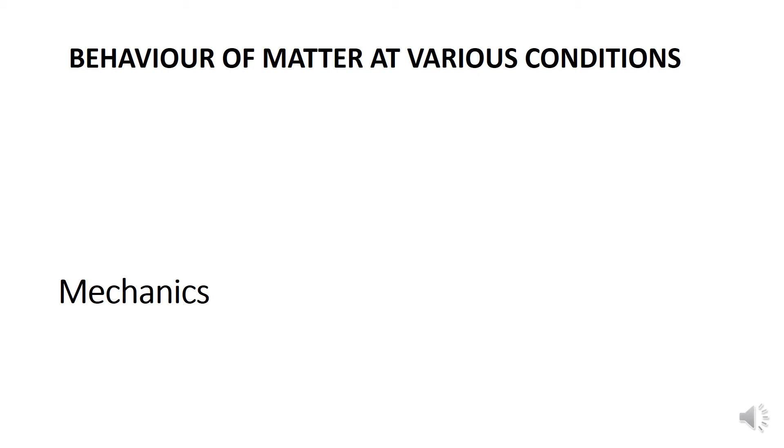Mechanics is an area of physics which concerns the behavior of matter, how it moves or behaves at different conditions. In general, if you search websites, you can see a definition like this: area of physics concerned with motion of macroscopic objects. With these macroscopic objects, we can define it for different matters.

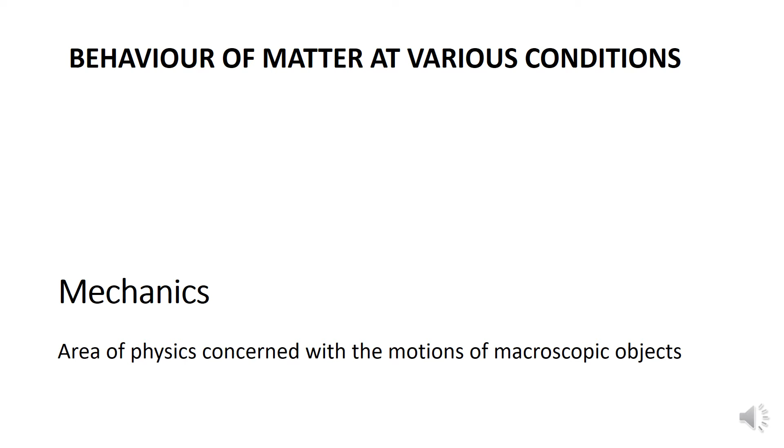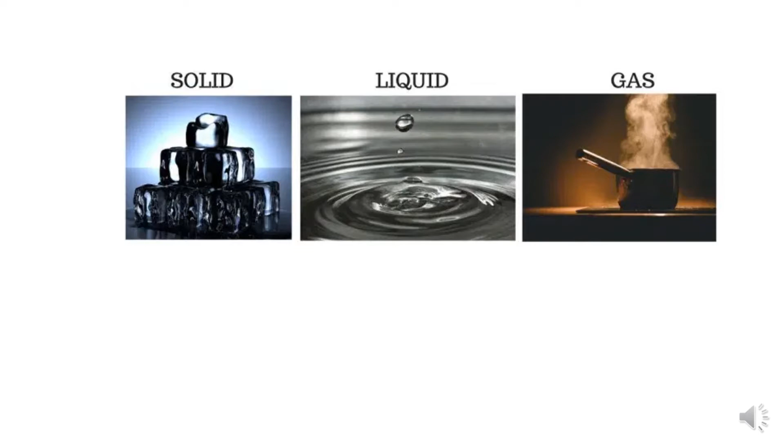As we know, we can take matter in three different forms: solid, liquid and gas. Can anyone tell me what is the difference between solid, liquid and gas? Yes, they differ based on the intermolecular attraction between the atoms. For solids, the intermolecular attraction is very high, so that's why it is closely packed.

Whereas in the case of liquids, the intermolecular attraction is comparatively less compared to solids. So that's why it's free compared to solids. Since the intermolecular attraction is comparatively higher for solids, it is closely packed and it will be

having a well-defined shape. But liquid and gas have comparatively less intermolecular attraction, and in both cases they will not have a definite shape. They take up the shape of the container. So the way a solid behaves is entirely different from how liquid and gas behave, and the basic phenomena for solids and for liquids and gases can be entirely different.

So we can classify liquid and gas into a single field. We can differentiate solid as one group and liquid and gas as a separate group, which is called fluids. In this course we will be understanding how liquid or gas behaves at different conditions, whether static or moving. Both cases we will be taking into consideration.

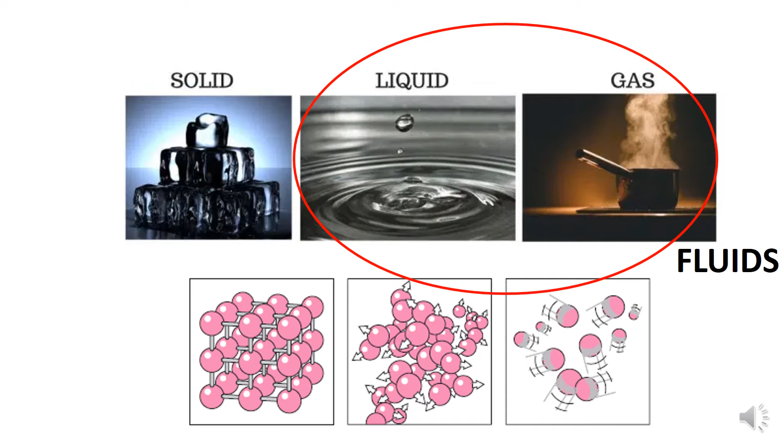In this course, mechanics, as I already explained, is an area of physics which concerns the behavior of matter. If you take the case of behavior of matter, it can be classified mainly into two types. The first one is statics and the second one is dynamics. Statics deals with bodies which are at rest and dynamics deals with bodies which are under motion.

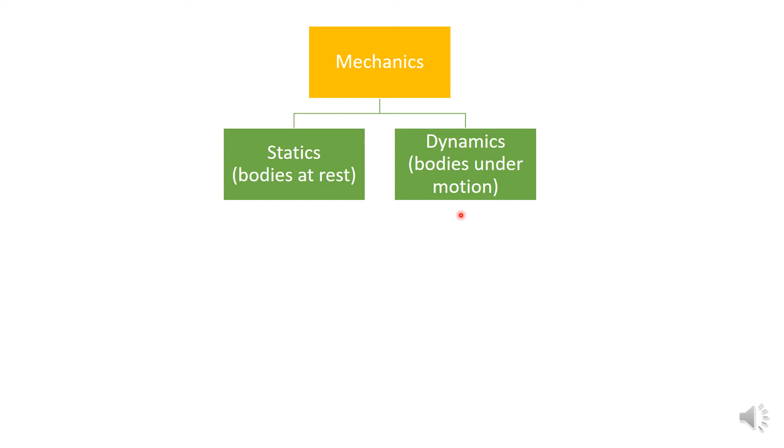In the previous phase, we classified matter into two different forms: solid and fluid. So mechanics is the science that deals with the behavior of the corresponding matter. If it deals with solids, it is called solid mechanics, and if it deals with the behavior of fluids, it is called fluid mechanics. In fluid mechanics we have fluid statics as well as fluid dynamics, where in fluid statics we study the fluid which is at rest.

One example is a glass filled with water in a stationary condition; it's a case of fluid statics. The behavior will be entirely different when the fluid is in motion. For example, water flowing through a river is an example of fluid dynamics, where we learn how it behaves in the flowing condition, how different properties or parameters vary when it is flowing, and how individual forces influence it. Such things are learned in fluid mechanics.

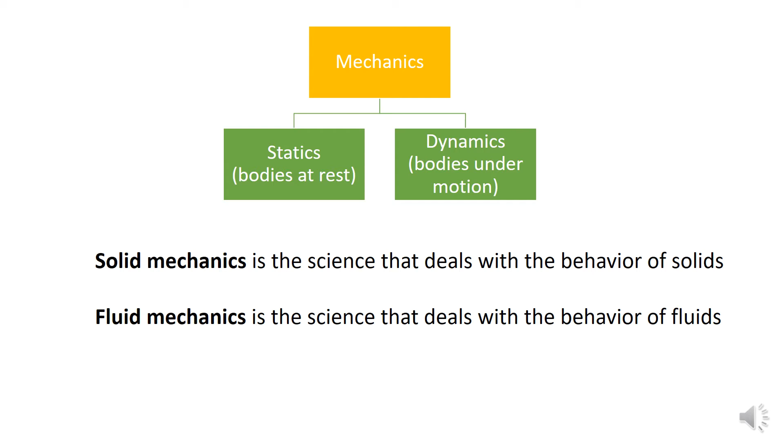Now, in order to differentiate between solid and liquid, we first need to understand a simple term called stress, which we have already learned in previous classes. What do you mean by stress? If you take a body and apply an external force on it, say a tension force on a rubber band, the body will induce a resisting force within itself, trying to pull it inwards. This resisting force per unit area is defined as stress.

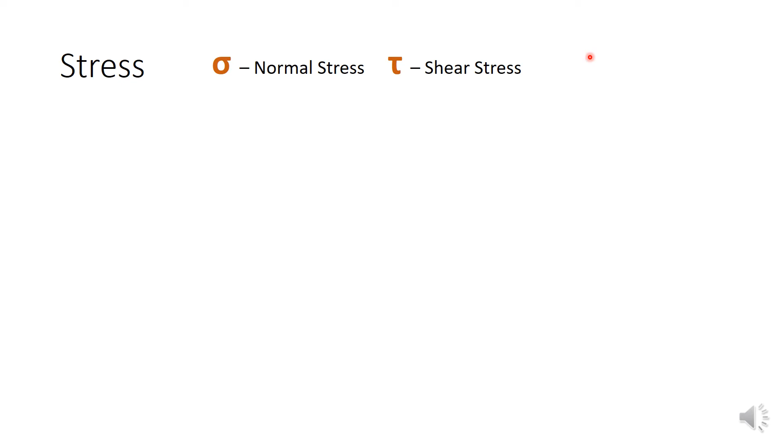It can be of two different forms: normal stress and shear stress. I'll just refresh what you learned. Stresses can generally be classified into three forms: tensile stress, compressive stress and shear stress. Tensile and compressive stress are examples of normal stress, and shear stress is a tangential stress. Normal stress acts normal to the area, and shear stress acts tangential to the area. Now how do we understand that?

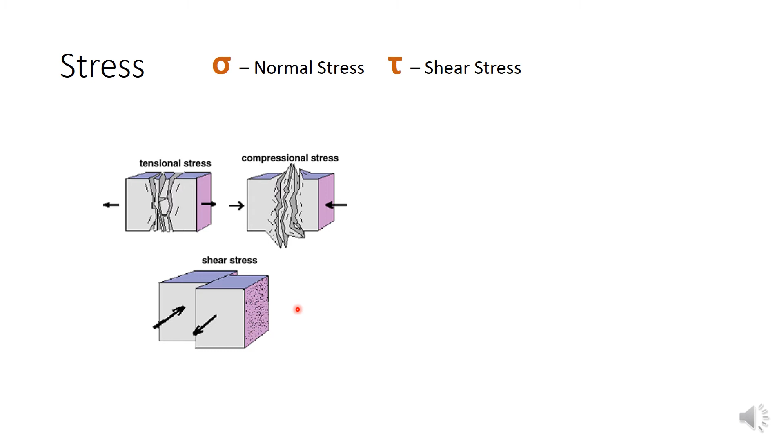Say I take a small surface with area dA, and a resisting force F is induced on the body, acting like this. If I resolve it into two components, perpendicular and tangential to the surface, the tangential component is Ft, the tangential force, and Fn is the normal force. The normal stress is the normal force divided by the area dA, so sigma equals Fn divided by dA.

In the case of fluid statics, we usually have only normal stress. We will not have shear stress because the fluid is not moving. The next one, shear stress, is the tangential force divided by area. Now we will classify solids and liquids, or fluids, entirely based on how they behave when subjected to a tangential force.

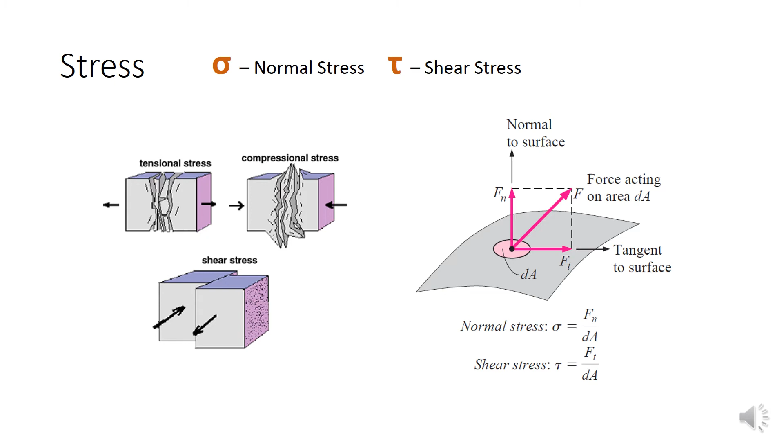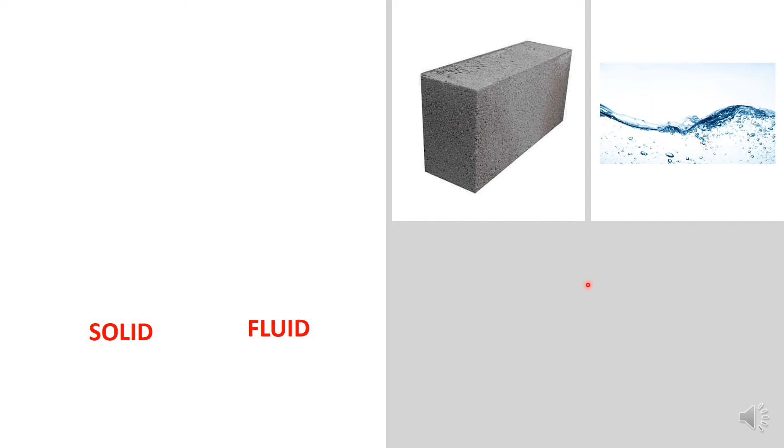Here you can see solids as well as liquids. To differentiate them, say I take a solid body placed between two plates, and similarly a fluid, which can be gaseous or liquid, placed between two plates. Assume the bottom plate is fixed and I apply a tangential force. This is the surface, and with respect to the surface the force is tangential to it.

So that's why you can define this one as a tangential force, or we will be assuming that it induces a shear stress on this corresponding plate. When that happens, if you take the case of a solid and you deform it, it will be trying to change its shape. If it is within the elastic limit, once you remove the force F, it will be trying to regain its shape.

Now if you are giving force more than the elastic limit, what happens? You will be having a permanent deformation. Once you release the force, it will have a permanent deformation, and you can't see any further deformation on the solid. But in the case of fluids, it will not be the same.

If I am giving a tangential force on this top plate, you can see the fluid will be deforming, and even if you remove this force F, the fluid will continue to move. So there is a basic differentiation between fluid and solid. In solids you will have a finite deformation, and in the case of fluids you can have continuous deformation.

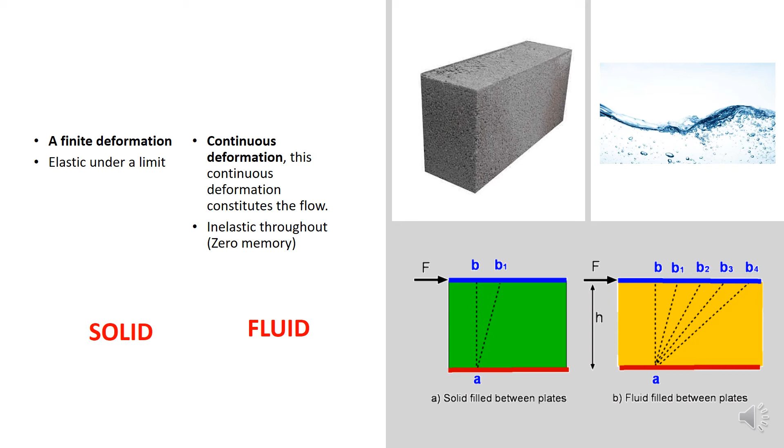Then here the stress is directly proportional to strain. Based on Hooke's law, stress is directly proportional to strain, but in the case of fluid it's different. Stress is directly proportional to the strain rate, the rate at which the straining happens. We will learn how we understood that later, in the next phases, in detail.

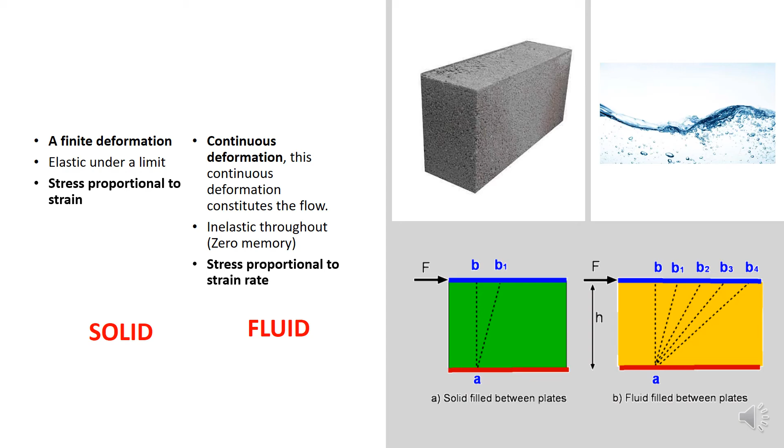Okay, the next one. So as a whole, fluid is defined as a substance that deforms continuously when subjected to shear stress, however small it is. It can be a small tangential force that you give, but still the substance continues to deform. Such substances are called fluids. That's why liquid and gas will have the same behavior, and that's why we define liquid and gas as fluids.

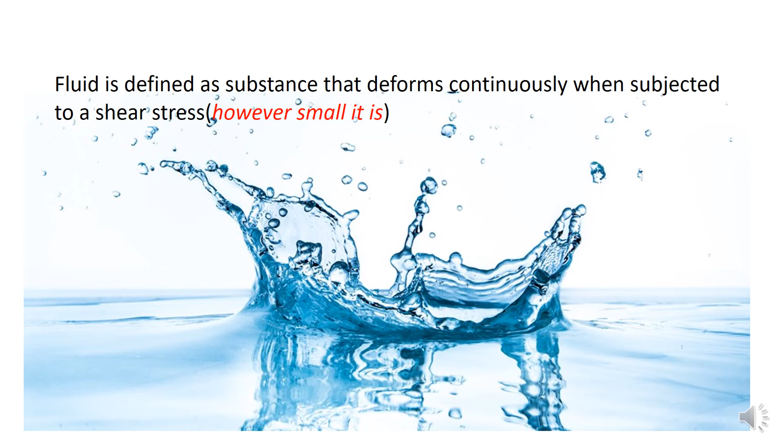Next we will understand why we need to learn fluid mechanics. In this course we will be understanding the basic working principle behind fluid mechanics, since fluid mechanics is widely used in many areas of our day-to-day life, ranging from vacuum cleaners to supersonic planes. A simple example: fluid plays an important role in our human body itself. Our heart pumps blood continuously through our blood vessels.

In the flow of blood, impure blood will be coming inside, and the pure blood has to be pumped outside. So the properties of the blood which comes in and goes out will be entirely different, and the pumping rate must be constantly controlled, and this is automatically controlled by the body itself.

And if any problem comes up in the flow, there can be problems for the corresponding person. He may become sick due to that. In some cases, we even have to replace his heart, and in such cases we use an artificial heart. For designing an artificial heart, we need to understand the basics of how it works, how the fluid travels, or how the fluid behaves at different conditions. Such details we will understand in fluid mechanics.

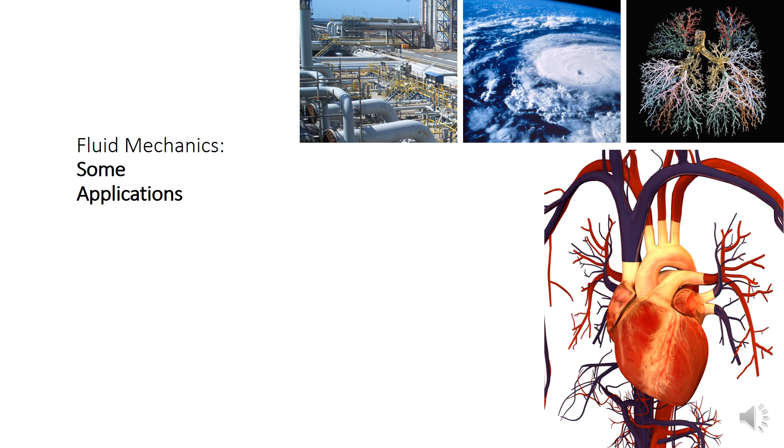When you take industrial applications, in some cases the heat generated will be very high and we need to remove the heat. In order to do heat transfer we need to have a proper understanding of fluid mechanics, how the fluid flows through the duct. Then as I already explained, F1 cars and all automobiles. Then aircraft, in all such cases we need to understand fluid mechanics.

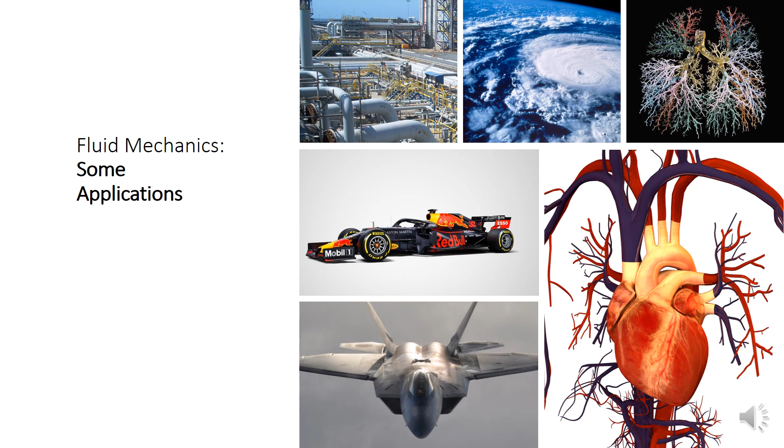Now the core objectives of this course are, first of all, we need to study mechanics of fluid motion. Next, we need to establish a fundamental knowledge of fluid mechanics so that we can address different problems encountered in different applications. Then we must be able to familiarize the relevance of fluid dynamics to many engineering systems.

As I already explained, we need to understand the fluid dynamics happening in the blood vessels in order to understand if there is any block happening in the blood vessels. For proper understanding of that we need to have a relevant understanding of the fluid dynamics of the corresponding systems.

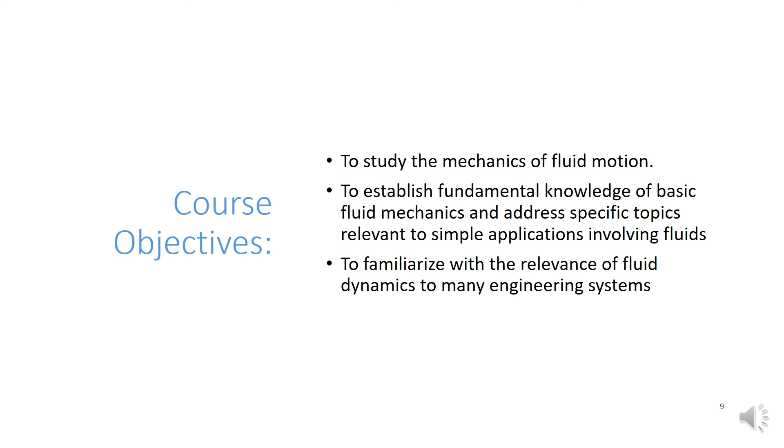Now going on to the syllabus. First we will be understanding the fluid properties which are used to characterize fluids in motion as well as in stationary condition. Then we will study fluid statics, understanding the basic working principle behind fluid at rest. Then we will be studying kinematics of fluid flow, then dynamics of fluid flow.

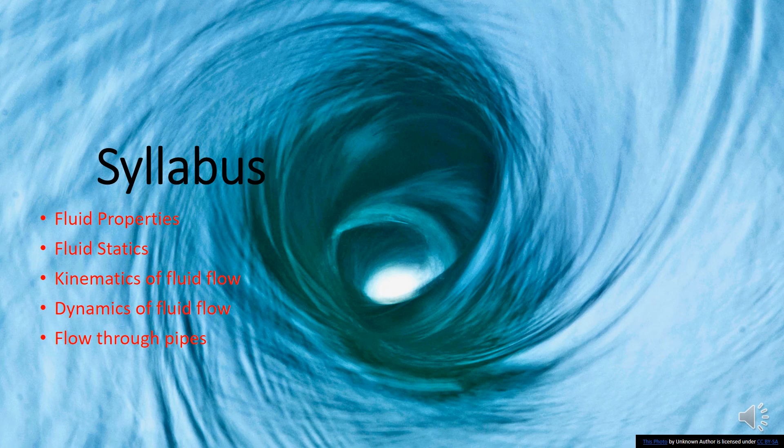Then we will understand how the flow happens through different pipes and what the influencing parameters are. Then we will be understanding the concept of boundary layer. Then we will be going through dimensional analysis and hydraulic similitude.